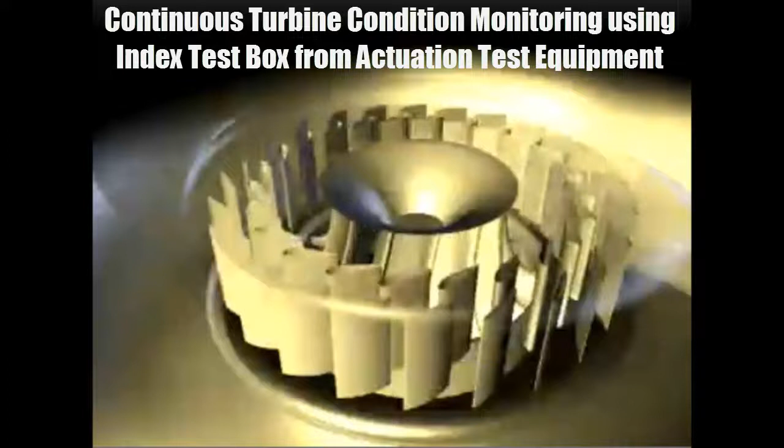A continuous monitoring test instrument for hydroelectric turbines will not only save money by detecting efficiency-robbing equipment problems early on that otherwise might go undetected for years, it will also provide individual unit efficiency performance data that is essential for any comprehensive water-to-wire hydropower joint load optimization program.

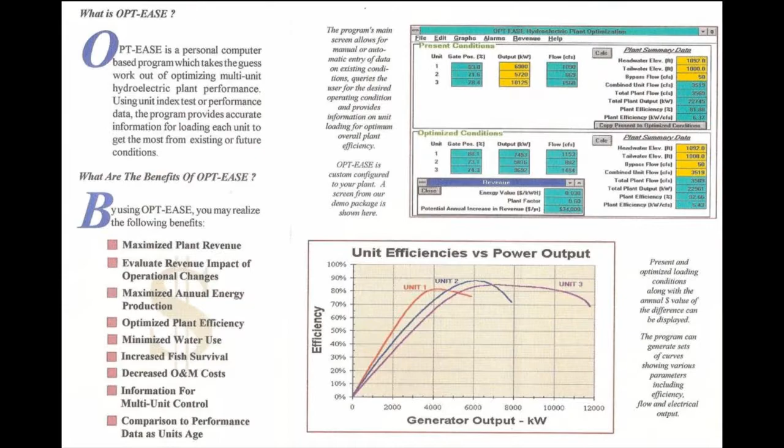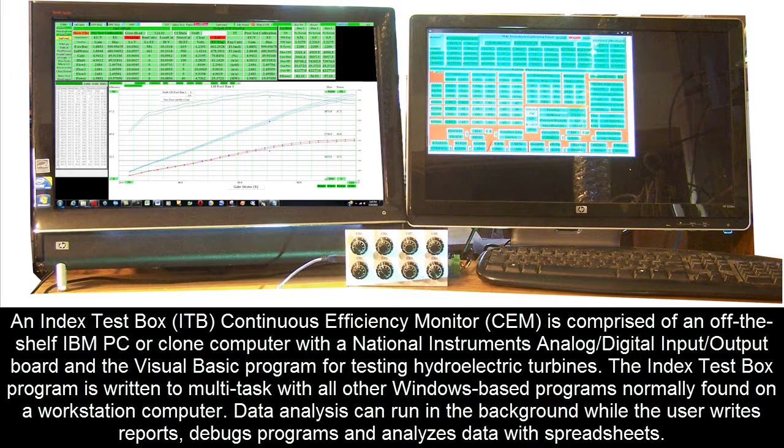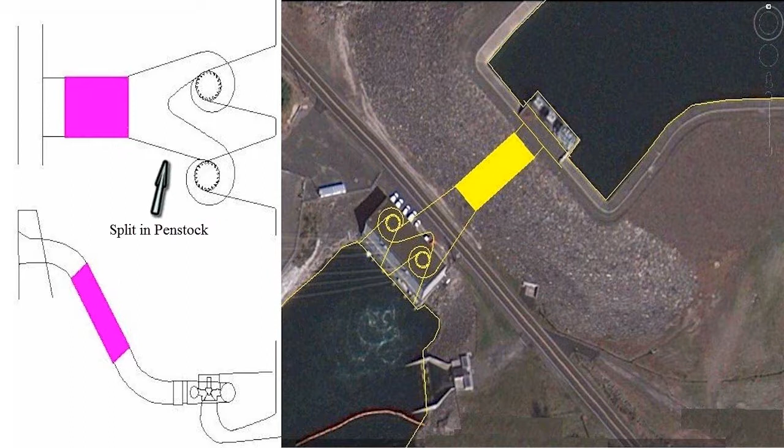The following is a real-world case study that demonstrates the savings that can be obtained by use of a continuous efficiency monitor to identify small problems before they become big, expensive problems. The subject powerhouse has a common penstock with a time-of-flight absolute value flow meter located upstream of a split in the penstock that supplies two Francis-type turbines.

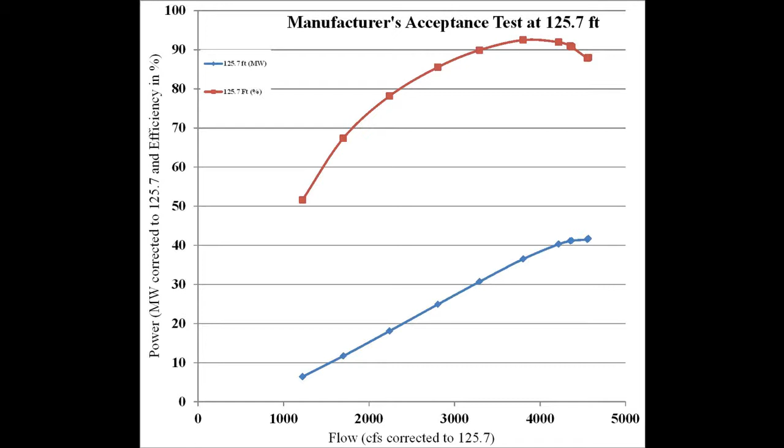After the manufacturer refurbished both generating units at the subject powerhouse in 2007, efficiency performance tests were conducted at the turbine's design head of 125.7 feet gross head to verify contract guarantees, calibrate the Winter Kennedy taps to absolute values, and establish a performance standard for subsequent efficiency tests.

Another index test was performed in 2009 when head was at 113 feet, 10% below design head. The purpose was to define flow and power tables for the units, but the index test showed up an unexpected problem.

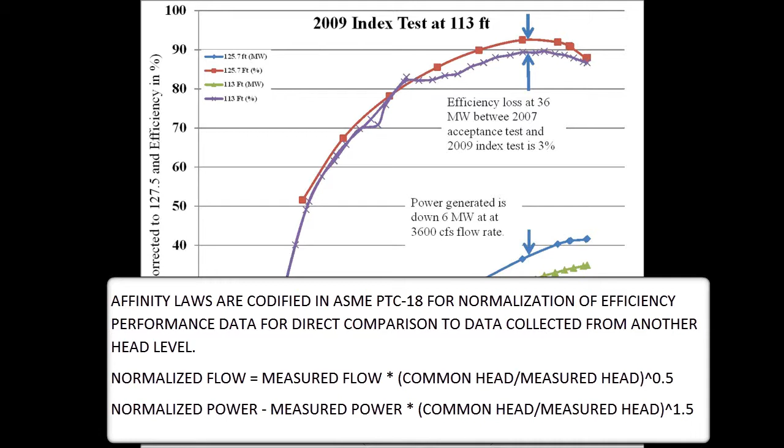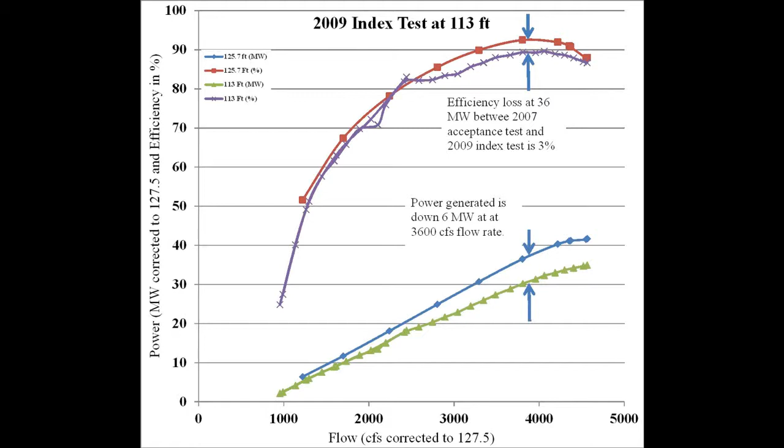The affinity laws were used to adjust the data from 113 feet to 125.7 feet for comparison with the acceptance test result, and then were supposed to be stepped in 1-foot increments to prepare flow tables between the two actual test points. Test results showed that efficiency performance of the machine was significantly reduced, so further testing was scheduled for when water levels got closer to the design head.

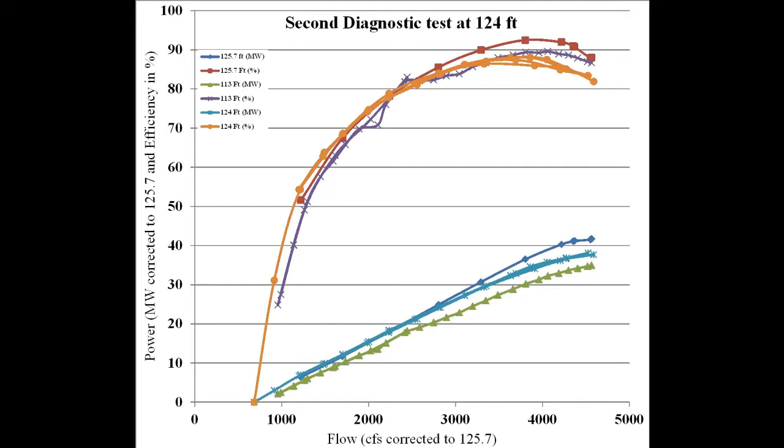A year later, when head had returned to a level closer to design head, 124 feet, which is 1.4% less than design head, a third index test was conducted for diagnostic purposes. A year after that, another test was conducted at 130 feet head, which is 3.4% above design head.

From these data, it was observed that the design head, the head at which peak efficiency occurs, had shifted from 125.7 to 140 feet, and that maximum generator output at rated head had decreased by 2.5 megawatts. This apparent 13-foot head loss is approximately the suction head from the draft tube's expansion at rated flow,

so the first diagnostic educated guess as to the cause of the problem was that air is leaking into the draft tube below the runner, defeating the draft tube's reclamation of the velocity energy in the water stream in the discharge. This could be caused by either a bad seal or a stuck open vacuum breaker valve. From here it becomes a process of elimination to find the culprit.

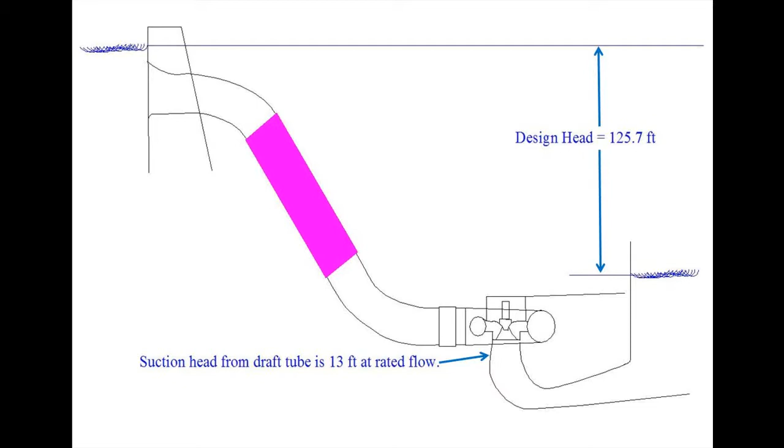We do not know and may never learn the final solution, but the need for a continuous monitor was dramatically shown by this case study. Chance played a role in this. If there had not been an efficiency performance test in 2009 to prepare new flow tables, this problem might still not have been found and the waste continued unnoticed.

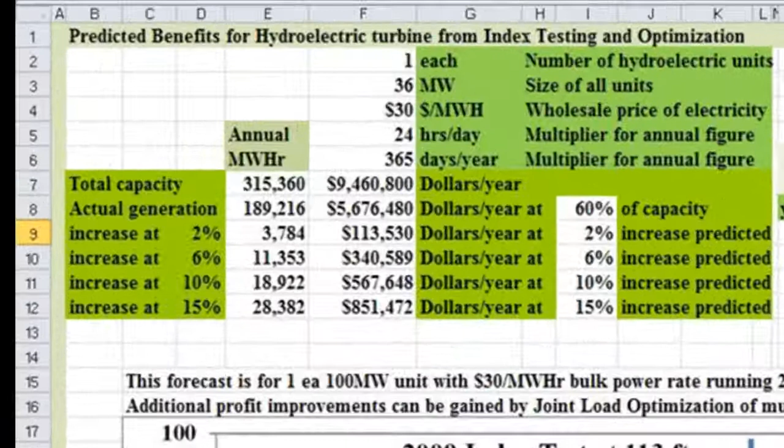The full impact of this problem will not be realized until the losses are put into dollars. This Excel spreadsheet was prepared to evaluate the losses associated with turbine inefficiencies. A copy can be downloaded from a link in the cover letter to this video.

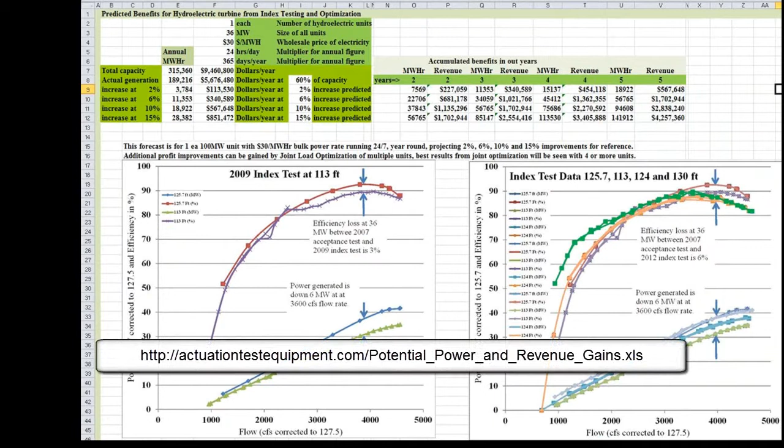A few assumptions must be made in the absence of actual generated power figures to put a dollar value on this loss. To show how the spreadsheet works, let's assume the turbine has been operated 60% of the time at what should be its peak efficiency point of 36 megawatts, where the preceding real-world efficiency performance analysis has shown a 6% efficiency reduction that has been wasting 2.16 megawatts valued at $64.80 per hour for over 3 years.

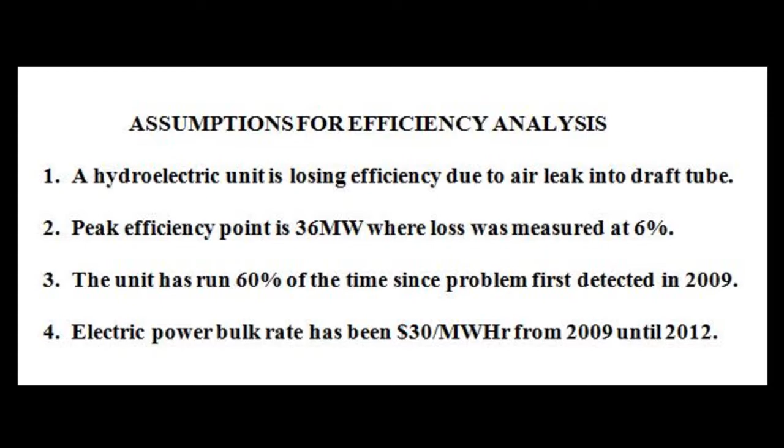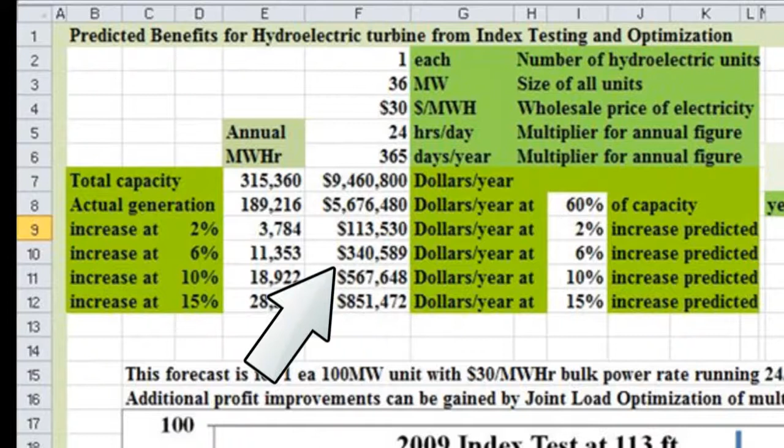This spreadsheet emphasizes the value of constant hydroelectric monitoring. This estimate shows the annual loss to exceed $340,589. Over the 3 years that the problem has been known to exist, from 2009 and before until 2012, total estimated losses exceed $1,021,766 since it was first detected in 2009 and finally diagnosed and corrected in 2012.

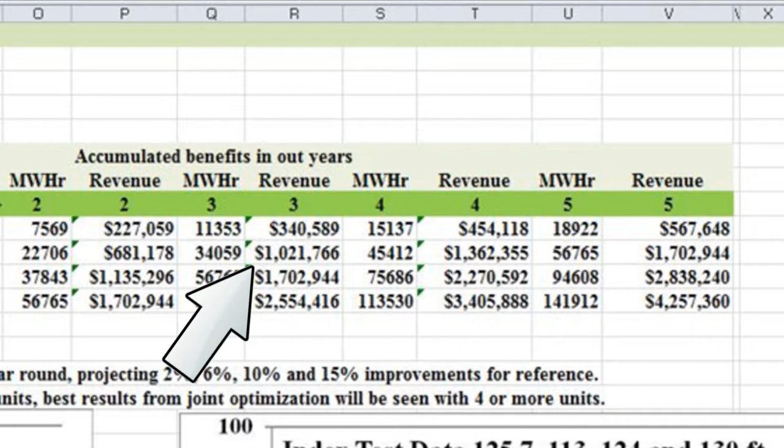An index test box costing about $50,000, installed and operating as a continuous monitor in this power plant, would have not only detected this problem immediately so that it could have been corrected early on, the real-world data would populate the flow tables with more relevant information to improve the data for subsequent condition monitoring.

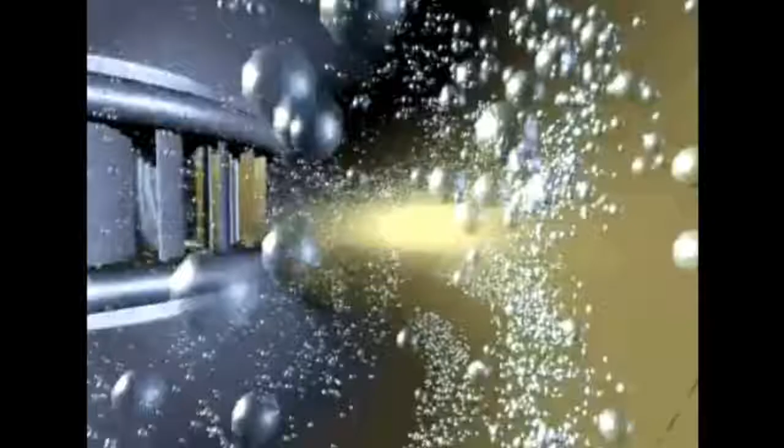The potential gains, or avoided losses, demonstrated by this analysis show how an index test box would have paid for itself in less than 2 months in this case study by saving over $1 million in 3 years. Having an index test box permanently installed as a continuous efficiency monitor would be like running an index test on these units every single day to catch small problems before they become big, expensive problems. Oh yeah, did I mention that a single index test box can monitor more than one unit?

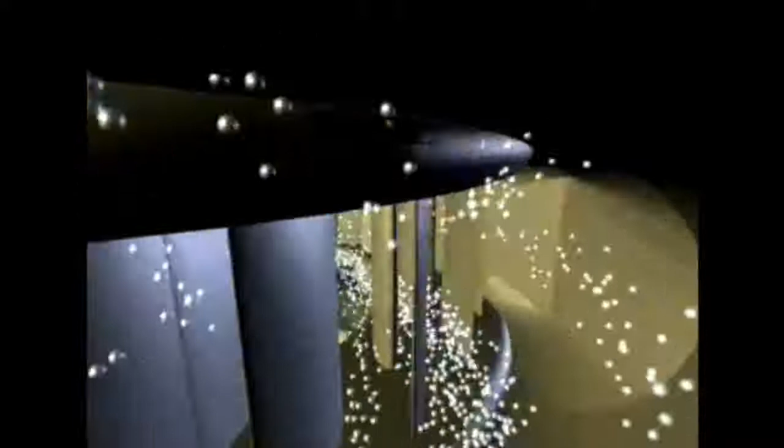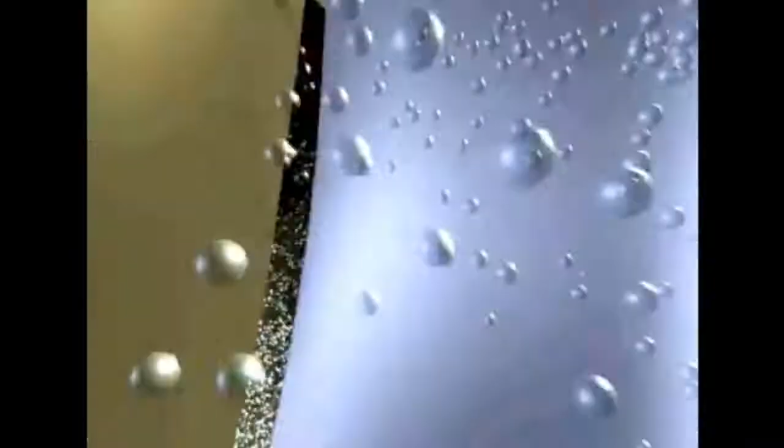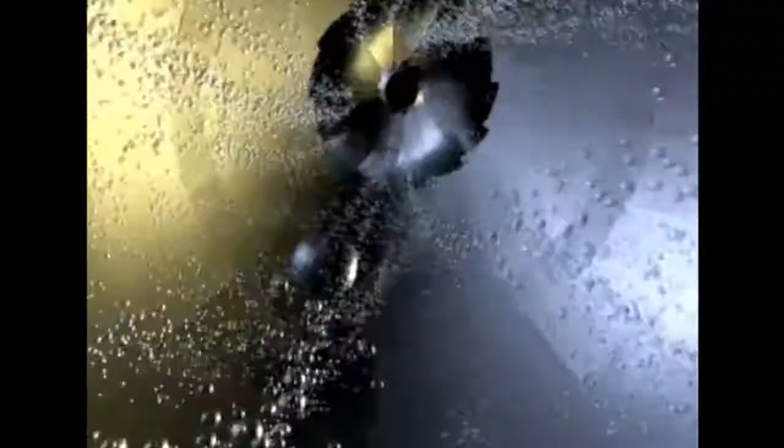An index test box continuous efficiency monitor is an off-the-shelf IBM PC or cloned computer with a National Instruments analog to digital input-output board and the actuation test equipment index test box Visual Basic program for testing hydroelectric turbines. The index test box program was written to allow multitasking with any other Windows-based program normally found on a typical office workstation computer.